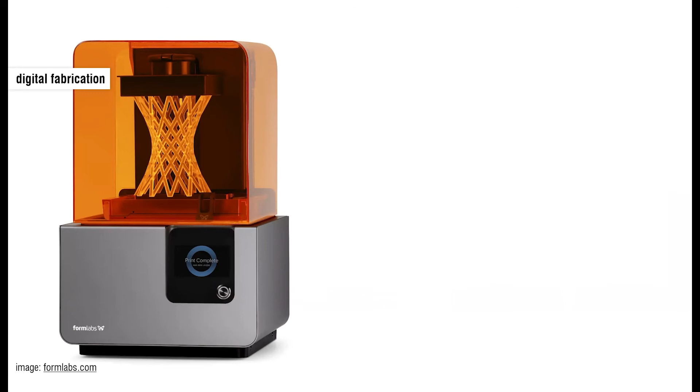I'm an assistant professor at HCII and I'm directing the Interactive Structures Lab. So we work in the areas of digital fabrication and engineering advanced materials. Let me give you an example. So we can engineer materials by designing the geometry of their cell structure.

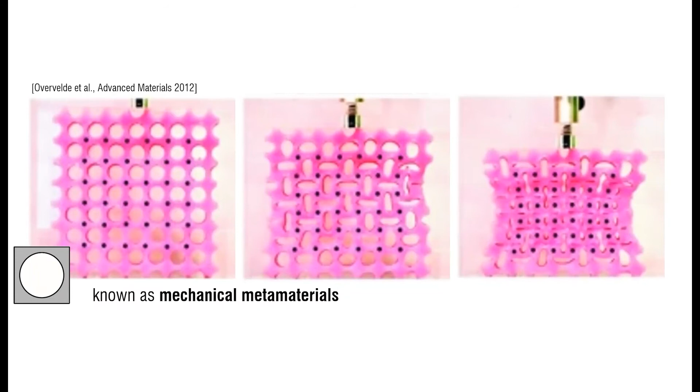Here you see it's only a circular cutout. While in this example, it's really just a bunch of holes, it still creates an unusual material property. So as it is being compressed, conventional materials would actually expand in the opposite direction. This one clearly does not. It does the opposite and contracts. So this is highly unusual. And this is to show that even with a very simple geometry, you can create materials that have very unusual properties.

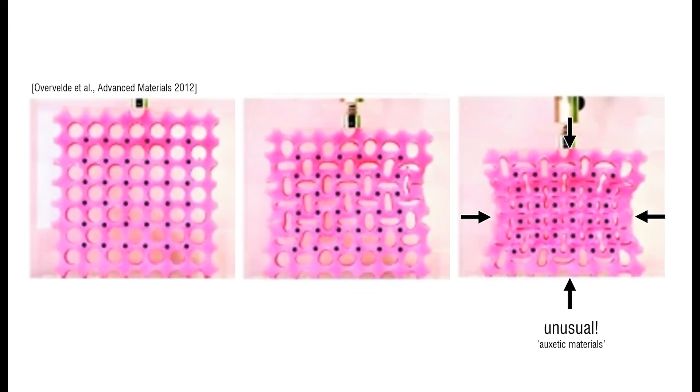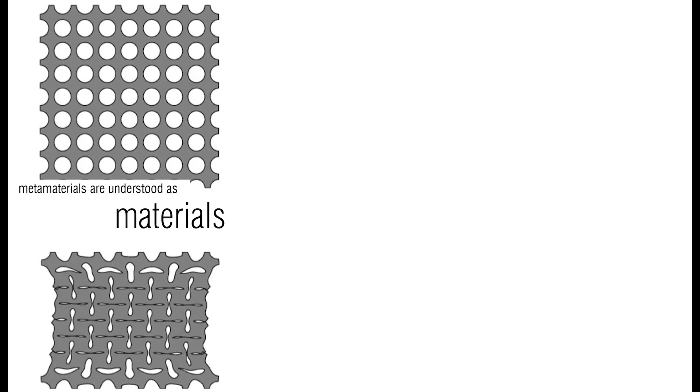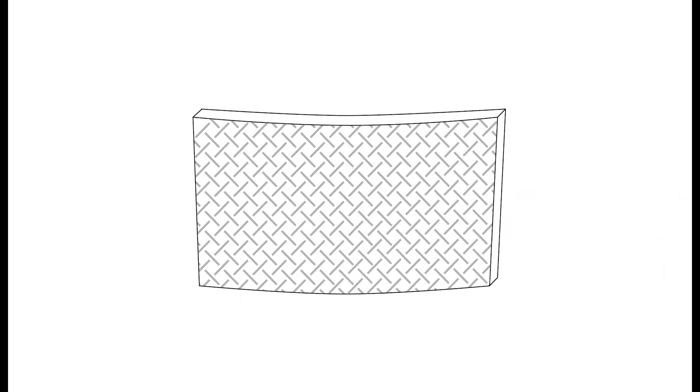So what other fantastic materials are possible? To find that out, we take a very different point of view in our research. So while these so-called metamaterials are traditionally understood as materials, we really think of them as devices. So our long-term vision is to design material structures that act like devices that can receive input, process that input in order to produce output, and all of that within one material structure. And that's what I like to call metamaterial devices.

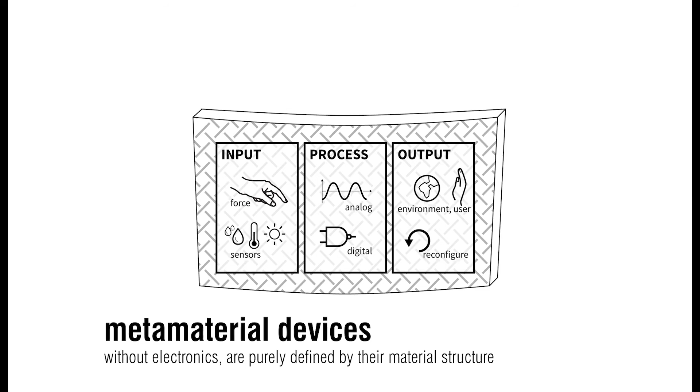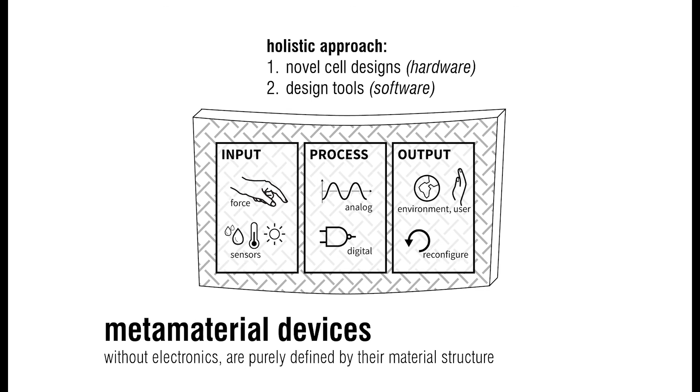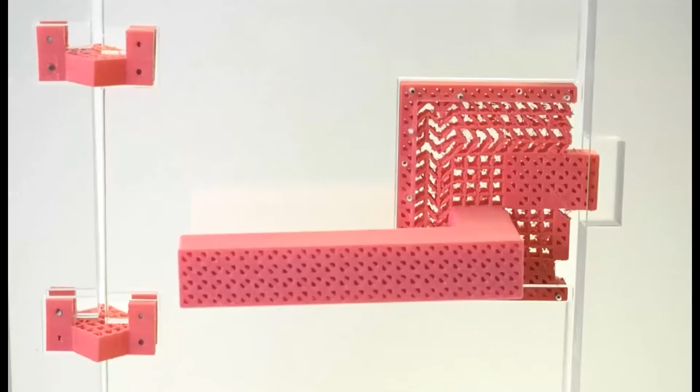So to achieve this, we contribute novel cell designs that enable novel functionality, and also we develop design tools to assist users creating them. I already looked at the potential of these materials, and I'll give you just a couple of examples. For example, analog processing materials. So here's one example of such mechanisms. It's a door latch that can be printed in one piece. So it transforms the input of pushing the handle down into the latch moving inwards.

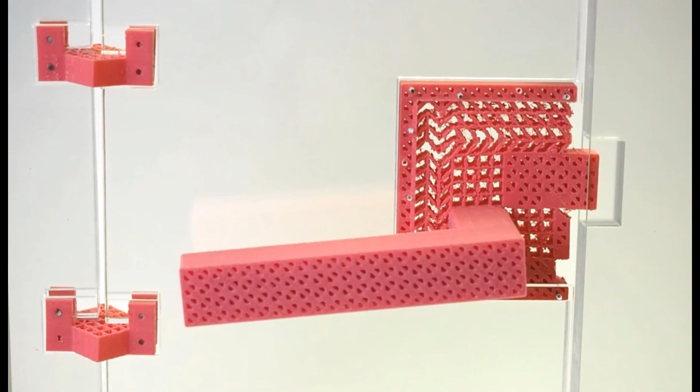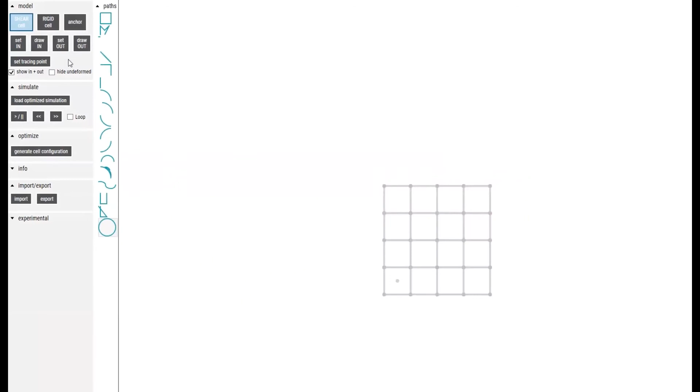We've also implemented an editor that includes a finite element analysis to allow users to iterate over their designs quickly. Well, designing such metamaterials is still very hard. So as a next step, we built computational design tools where we dug deeper into the structures to understand their underlying mechanisms and to automate the design for the user. So here we really look at optimization problems, and in this case, it's combinatorial optimization.

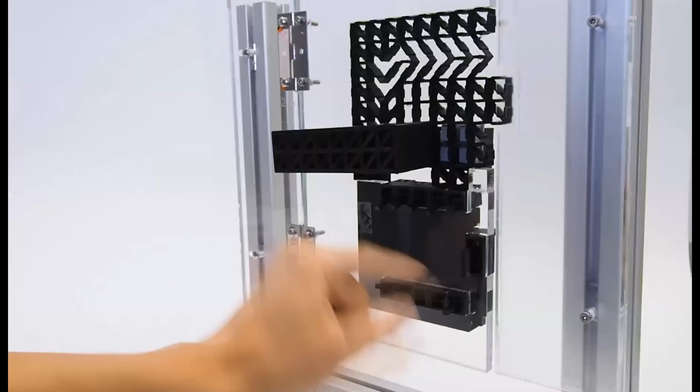So as we know, analog devices suffer from signal decay. And to avoid that, we created digital materials. Here's an example where we built a door latch that evaluates the user input code, and only if that code was correct, the signal travels all the way up, the bolts are retracted and the door can be opened. All of that built into the material structure. And we also investigated gates, including the NAND gate.

Lastly, I want to show how we create output with such materials. For example, we use textures that users can transition through and thereby adapt their objects, in this case, the shoe sole, to the context, the weather, for example. On a higher level, such metamaterials allow us to add functionality to materials, yet they are lightweight due to their porosity. They're sustainable because we use only a single material. They miniaturize very well because they don't need assembly, and their lifetime can be defined better and we can foresee when they will break.

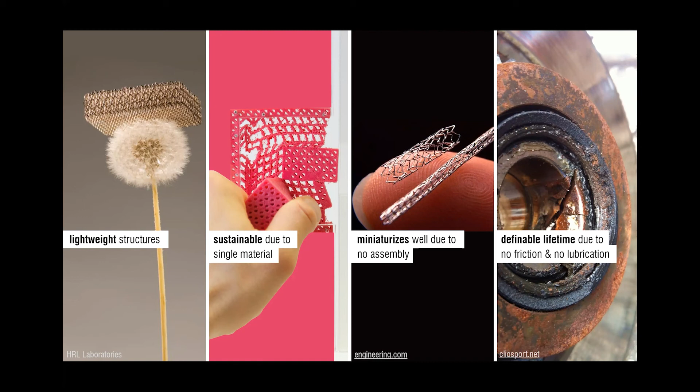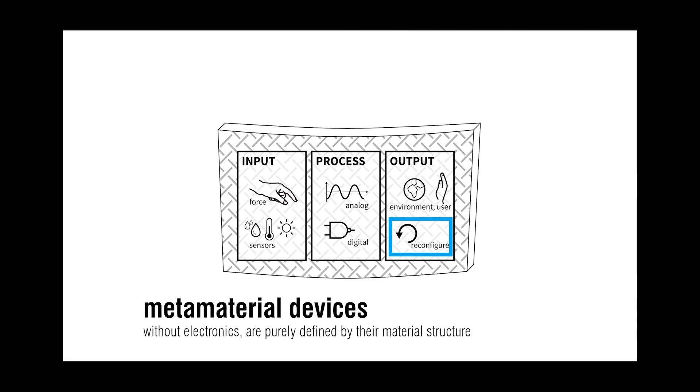So what will we do in the future? In the future, there are many parts still to investigate, such as designing sensor cells that react to the environment, and also reconfigurable cells that reconfigure the material for multifunctional materials. Let me give you two examples. With reconfiguration, we could create mechanical displays or non-volatile information storage, for example. And by adding sensor cells, we could even think of, for example, fences that adapt their permeability based on sunlight, or drywall that switches between cooling and heating.

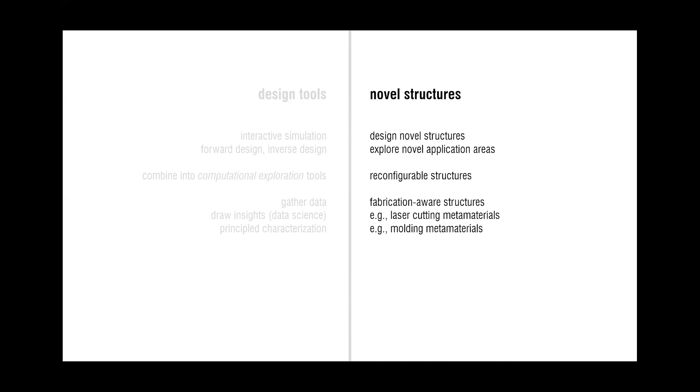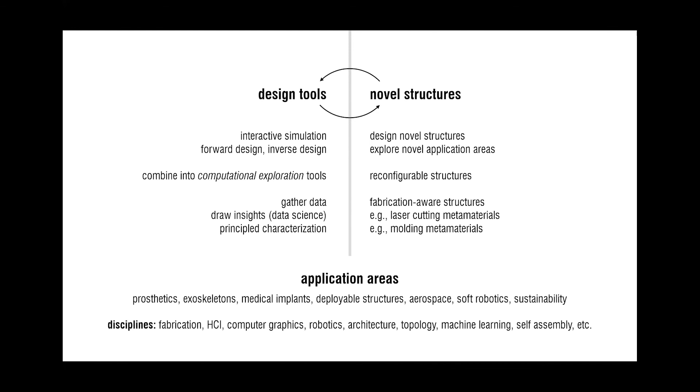So to get to such advanced materials, we need to research design tools that allow efficient computational exploration of this virtually infinite design space of metamaterials. And at the same time, we investigate novel material structures, fabrication methods, and applications to make such devices a reality soon. And importantly, the design tools and the novel structures will inform each other. Such materials have various application areas, including prosthetics, medical implants, or soft robotics, and are highly interdisciplinary.

So very briefly about me. Hi, I'm Alex. I started in January at HCII. Before that, I was a postdoc at ETH Zurich in a computer graphics lab, and I did my PhD at the Hasso-Plattner Institute in Germany in HCI.

So a couple of human things about me. I like concerts, sessions, particularly experimental jazz. I love singing, and I used to play volleyball when I was a little younger.

So this is the brief overview of our research at the Interactive Structures Lab, and shoot me an email if you're interested in joining the lab.